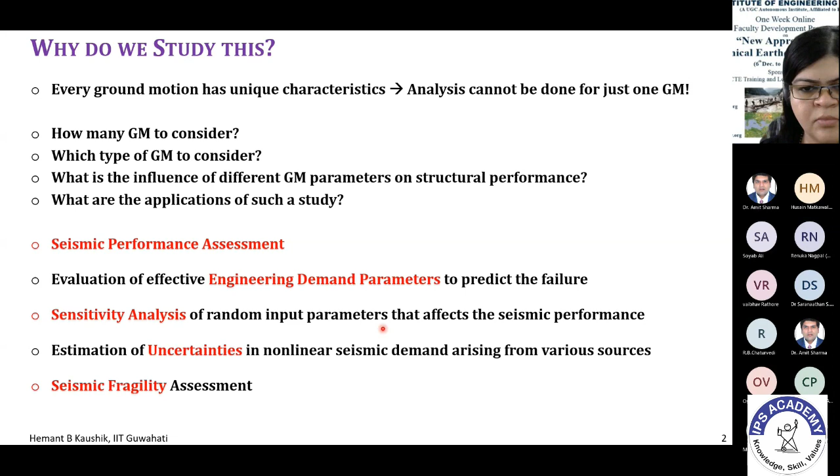First I'll tell you what input properties I will be considering in this study. These input properties remain the same for all the applications. This is a 4-story reinforced concrete frame that I'm considering. This frame is the middle frame of a multi-story building, so I'm analyzing only this frame. These are the dimensions of the building, and the dimensions and reinforcement detailing of the columns and beams. I'm considering three configurations of this frame.

The first configuration is the fully infill frame. The second configuration is the open ground story frame, where we don't have masonry walls in the ground floor—these are the OGS frames. These are the fully infilled frames, FI frames. And these are the bare frames, BF frames, where we don't have any infill walls.

In each of these frames, this is the basic frame, and I'm changing parameters: the number of bays from 1 to 6, the number of stories from 2 to 6, and the opening in the wall from 0% to 90%. 0% opening means it is perfectly solid, no opening at all; 90% means it is more or less fully open in any story. That's the variation in opening percentage. The peak ground acceleration variation I'm considering is from 0.1g, which is very low, to 1g, which is very high. These are the variations I'll be considering in all these studies.

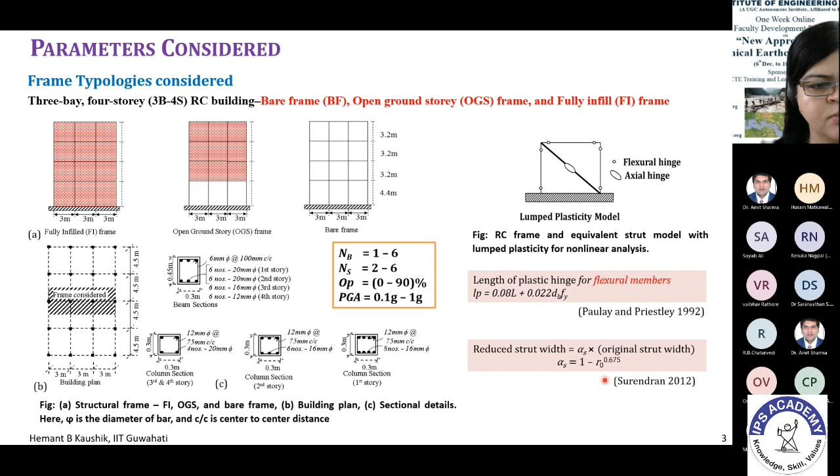If you have to carry out the seismic performance assessment, there are many methods. One of them is nonlinear dynamic analysis, where we use these ground motions. I will be considering all three types of frames and then the material model for concrete. The material model is the cyclic degradation model because we are using dynamic analysis, the cyclic nonlinear dynamic analysis. For steel, this is the material model.

Of course, you have to provide the details for the degradation in the material, and for the masonry infill as well. This is also cyclic, with degradation curves.

Once we have these material models, we have to then consider the ground motions. So these are some of the ground motions that we need. And then we have to carry out some finite element sensitivity analysis, just to understand what kind of refinement, what kind of mesh size, how many elements we have to use.

Considering all these together, we can carry out the dynamic analysis and get output like this, where we are plotting the peak interstory drifts along the height of the frame, for three different frames: bare frame, open ground story frame, and fully infilled frame.

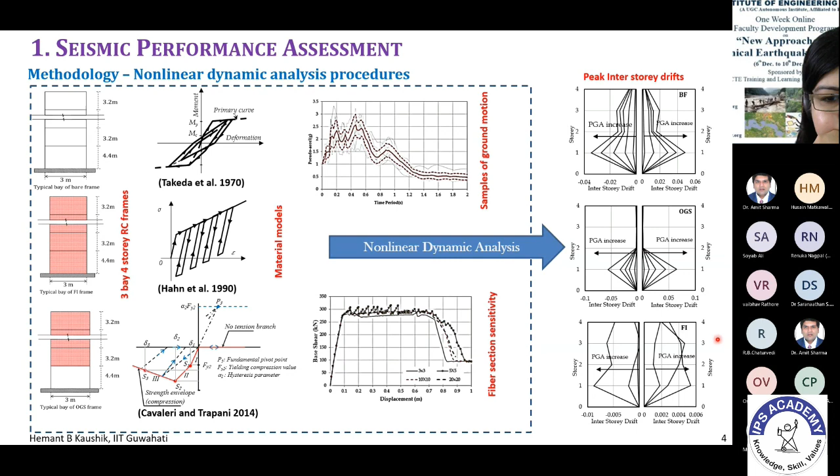For those of you not familiar with energy density, you must be knowing the response spectrum. So here are the response spectra calculated and plotted for each of these 7 ground motions.

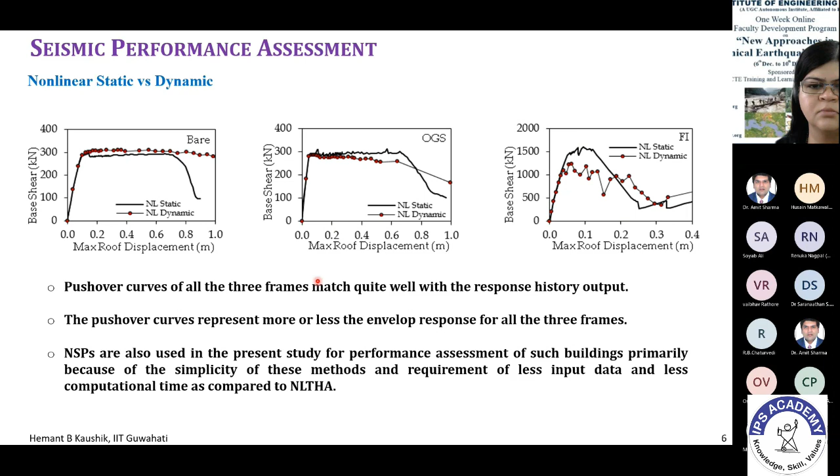Now we'll use all these input properties, all these observations in the second part of the study, which is the evaluation of effective engineering demand parameters. Now the question is, why do we need this? Why can we not simply use the top story displacement as the engineering demand parameter?

Let me inform you that 99% of the studies use the top story displacement as the engineering demand parameter, because that is the easiest demand parameter to obtain.

Now let us see what happens when we do that. So what I'm showing you here is the open ground story building, which is vertically irregular, and we will use some of the local EDP and the global EDP in these buildings.

So we know what is the problem with the open ground story, right? The ground floor columns are subjected to very heavy ductility demand, very heavy shear demand, and most of the time these ground floor columns fail.

What we see is very interesting: most of the lateral deformations are accumulated in the ground floor during earthquake, and the upper floors are more or less undamaged and remain vertical. So there's no relative deformation in the upper stories of the open ground story frame. All the relative deformation is accumulated here in the ground floor only, because it is so soft.

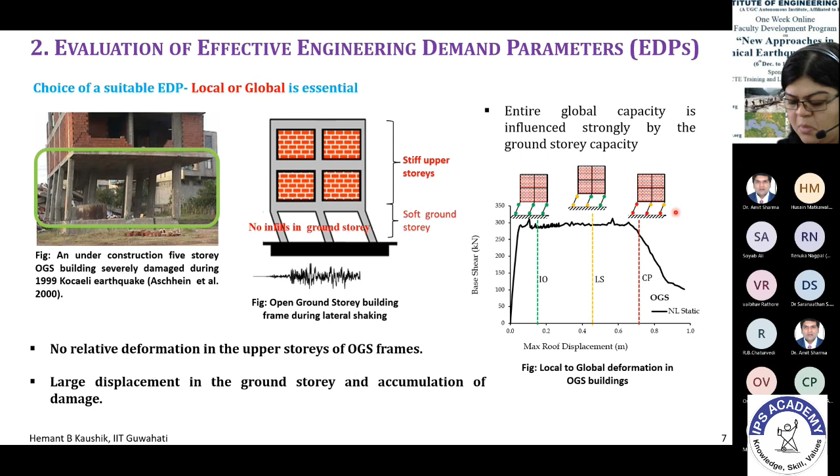So we'll consider these types of failure modes. This is what I was mentioning: when you apply a lateral load at the top, the lateral deformation of the open ground story frame is such that you have huge accumulation of all these deformations here only, and the vertical upper floors don't generally deform much.

So what we did was consider the mean sampled frames. I'll let you know later what these mean sampled frames are. Mean means all the material values, all the geometry values, all the loading values were considered mean.

So there was no variation in the properties as far as the geometry is concerned, as far as the material is concerned, and as far as the loading is concerned. But there are huge variations in the ground motion parameters.

So we consider these 7 ground motions and scaled them for 25 different PGAs. We carried out 525 nonlinear time history analysis runs, and these results are the output of these 525 nonlinear dynamic analyses.

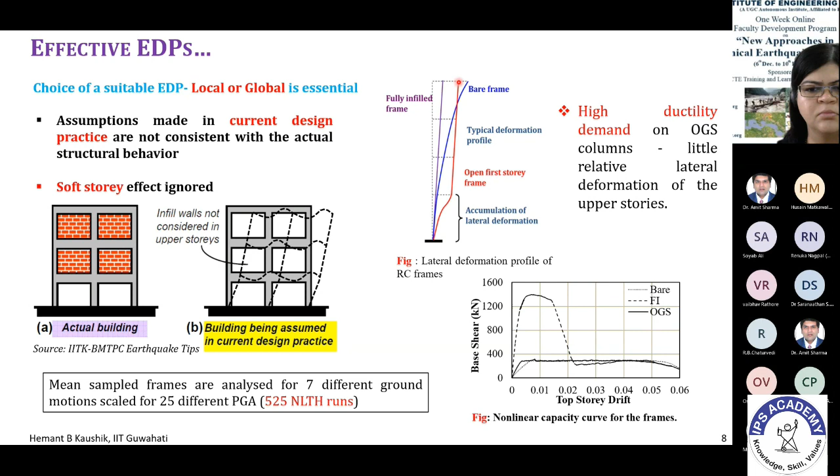In the first instance, we considered the maximum top level displacement as the engineering demand parameter. So if you look at this figure, this displacement only - I'm considering this as the engineering demand parameter.

So considering that displacement, I'm plotting here the relative displacement along the height of the building: first story, second story, third story, and fourth story. I'm comparing these bare frame deformations with the open ground story frame deformations.

As we discussed already, in the open ground story, most of the deformation is accumulated in the first story only, and the upper stories remain vertical and undamaged, with not much deformation there. But the bare frame deforms gradually from bottom to top.

Now, if we consider the top level displacement as the engineering demand parameter, it is very obvious that the bare frames are subjected to higher demands. So that means you would think the bare frames are more vulnerable because demands are more.

But that is not true, right? We know that open ground story frames are more vulnerable, they are more risky. So if we compare the full infill frame with the OGS frame, we get these kinds of results. Even in some cases, the full infill frame also behaves more or less like the open ground story frame once the ground floor infill fails.

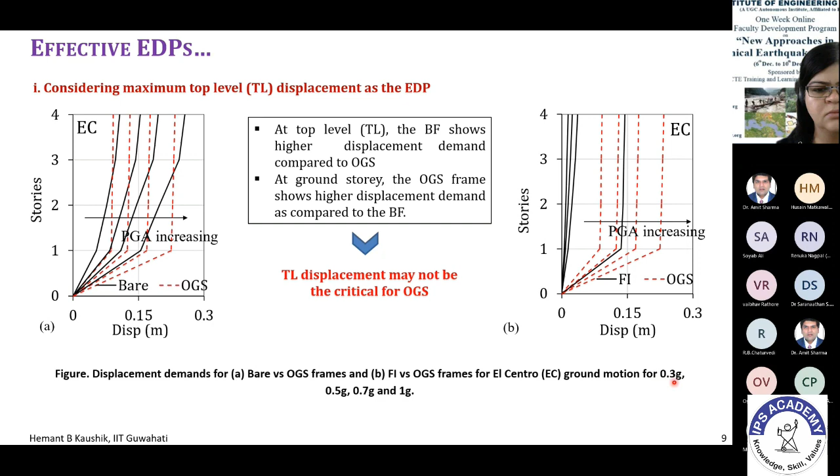Now, this study was carried out for only three or maybe four peak ground accelerations: 0.3g, 0.5g, 0.7g, and 1g. But if we consider the full variation in the peak ground acceleration, right from 0 to 2g, then a very interesting picture comes to mind.

See, here you see all three plots are for the bare frame top level displacement, open ground story frame top level displacement, and fully infill frame top level displacement. So what you see here is that the bare frame, of course, is having the maximum demand, right? Then it is followed by the open ground story and finally the fully infilled. This is not correct. This is not the real behavior of the structure.

Now, if I plot the ground level displacement, then what you get is that open ground story frame has the maximum demand, followed by the bare frame and the fully infilled frame, right? So this is more realistic. It appears to be more realistic. But then, mind you that this ground level displacement we are considering from the same results, right? This is not a different analysis. The analysis remains the same.

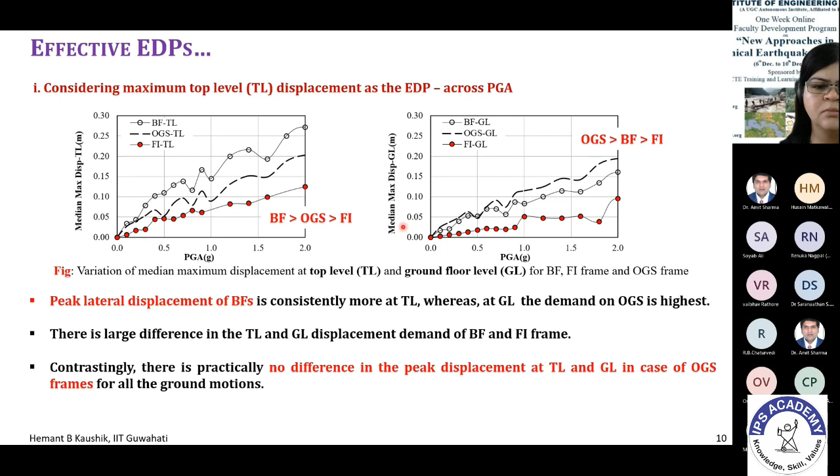Now, let us consider a different engineering demand parameter. So here I am considering maximum inter-story drift as the engineering demand parameter. So look at the output.

If we consider the bare frame versus the open ground story frame, these are the kinds of output we are getting. So even in case of maximum inter-story drift, here it means that the first story inter-story drift we are plotting is the second floor inter-story drift and third floor. So obviously you will find that above second floor there is no inter-story drift in case of open ground story frame, because all the deformations are accumulated here. In case of bare frame, you always have gradual displacement from bottom to top, and these are the variations, the relative displacement variations, which are actually the drift across the height.

So this appears to be a better model, because in every case you will get the demand more in case of open ground story, right? Even if you compare the fully infilled with the open ground story, the same story is there. So this is only for the El Centro ground motions. Obviously these results show that the ground floor columns are subjected to very high ductility demand. And we need to have this component level demand to capture the failure. Otherwise we'll not be able to capture the failure, we'll not be able to find out the real vulnerability.

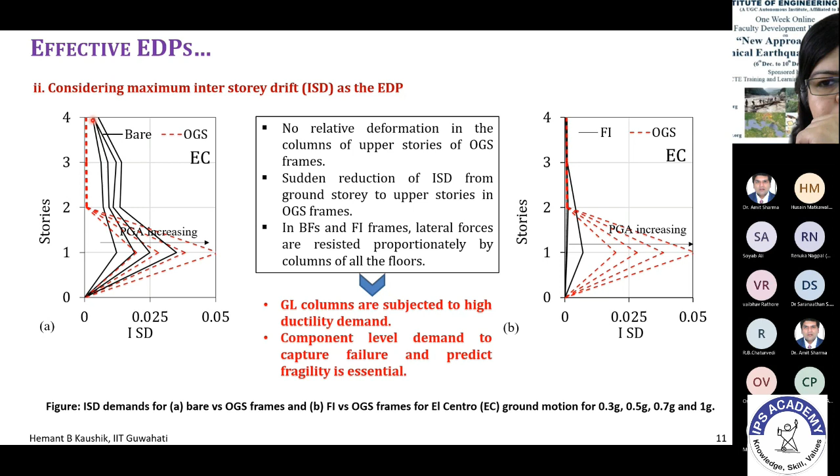So if we now compare across the PGA level, the same ISD as the EDP, a very different picture emerges here. Again, you will get that across the PGA level, you again have this bare frame demand more, if you consider the top story inter-story drift, right? If you look here, after second floor, you have this more, right? So bare frame is more vulnerable in that case after second floor. So this is what is happening here.

This is followed by the fully infilled frame, which is the red dots, and the open ground story frames, which are these dotted lines, right? And if you compare the ground level, the story is completely changed. Again, you will get that open ground story has the highest demand, followed by the bare frame and the fully infilled frame, right? So obviously, we cannot use top story displacement to design the open ground story frames, or even to assess the open ground story frame.

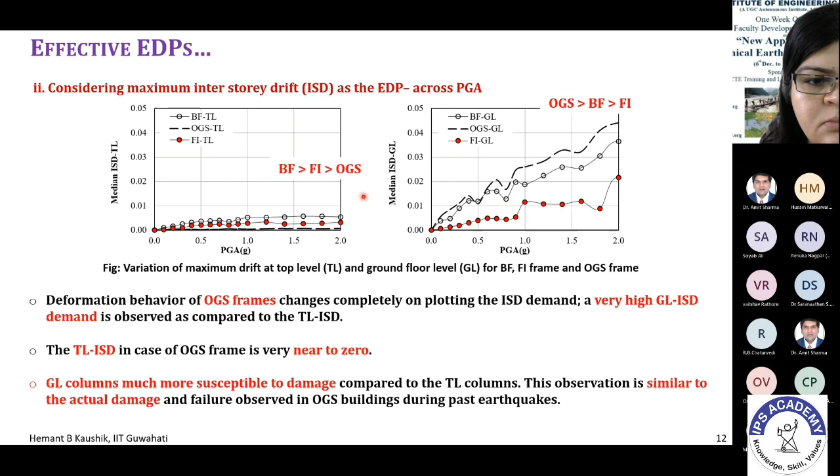Now, if you compare the degradation in the stiffness when the damage occurs in the building, let us compare that degradation by finding out the stiffness factor, which is the ratio of base shear to displacement at different levels. And it is normalized with respect to the maximum top level stiffness.

So when we do that, you can see very easily here that for the open ground story frame, there is no difference at all when we find the stiffness factor for the top level and for the ground level. But for the bare frame, there is a difference. For the full infill frame, there is a difference. So this clearly shows that open ground story buildings have no influence whatsoever coming from the top level displacement. It is only the ground level displacement that is the influencing factor here.

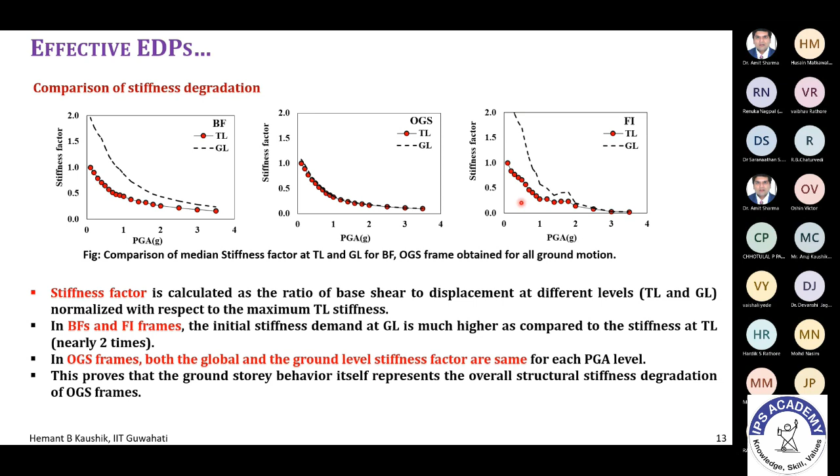But in case of the bare frame, of course, there is a huge difference between top level and ground level displacement, and in the fully infill frame also. So this again validates our observations. Then we can compare various engineering demand parameters similarly. We have compared the peak top level. We can compare the story displacement corresponding to peak top level displacement, and then the interstory drift at top level. We have already considered that, and the interstory drift at the ground level.

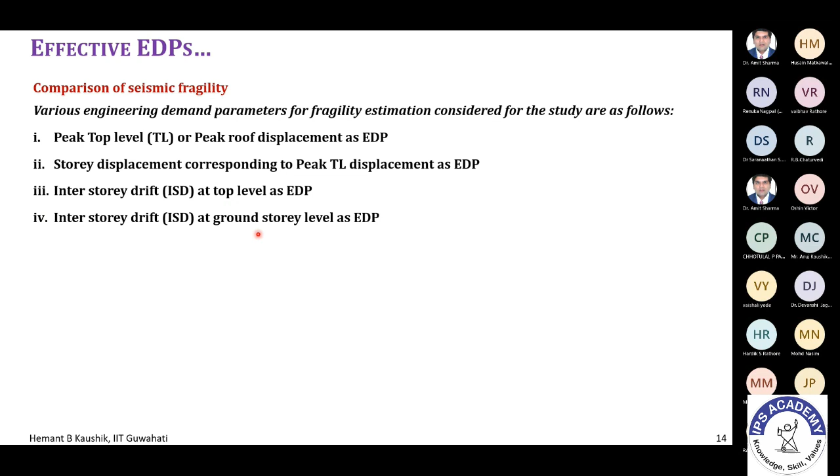And if we find out the seismic fragility, we get these kinds of results for different ground motions. So these are the damage states. For different damage states, we get the seismic fragilities, and these fragilities are shown on the vertical axis here. For slight damage, moderate damage, extensive damage, and collapse, we get such kinds of fragilities. So the shaded bar charts represent the bare frame, and the filled bar charts represent the open ground story.

So you can see here that there is no definite pattern, right? In some cases, the bare frame fragility is more. In some cases, the open ground story fragility is more. Even in the comparison between fully infilled and the open ground story, the same situation is there, right? So what I want to show here is that the fragility estimation with top level displacement as EDP gives the wrong essence of the physical behavior or the failure pattern of irregular open ground story frames under the effect of seismic input.

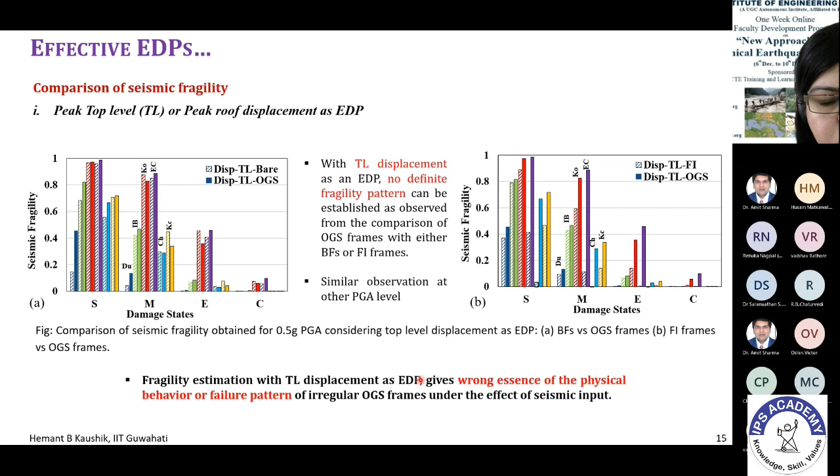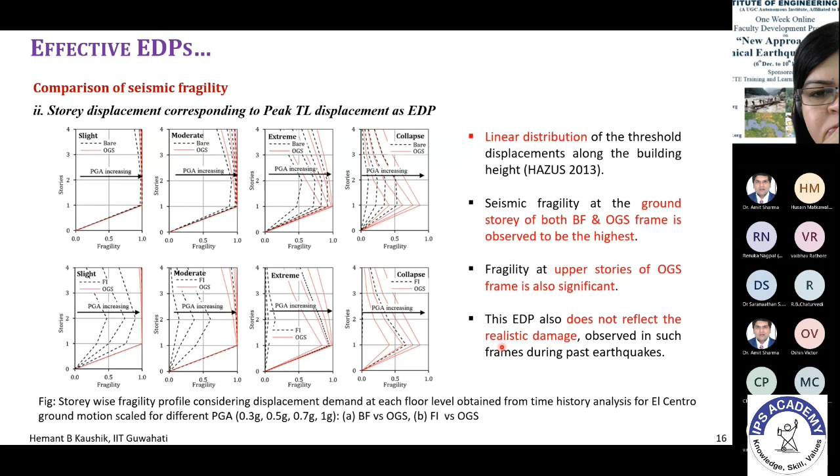So the third EDP: if we use the interstory drift at each floor level as EDP, then we get this kind of behavior. So this is the story-wise distribution of the fragility for the bare frame for one peak ground acceleration, this for OGS, and this for fully infilled. So again, same story, right? For each floor level, if you use it, then it's not much use actually, because the behavior is more or less similar in all three cases.

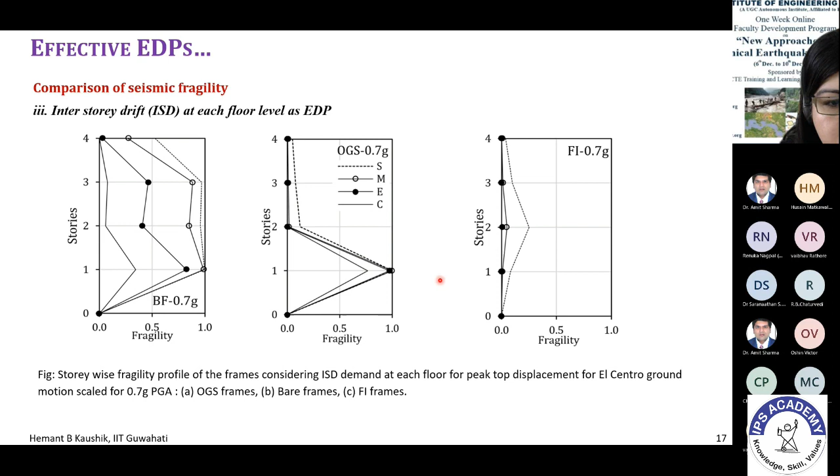And here also you will find these are the fragilities for the interstory drift at top level as EDP. So you can find that the seismic fragility of the top story columns is almost nil. We are talking about the top story here. So for the OGS, the solid filled bar charts are almost not there, right? So the seismic fragility is very less, almost nil, compared to the bare frame or the fully infilled frame. Again, not realistic here, and basically we are not worried about these top story columns in case of OGS because we know these columns don't fail.

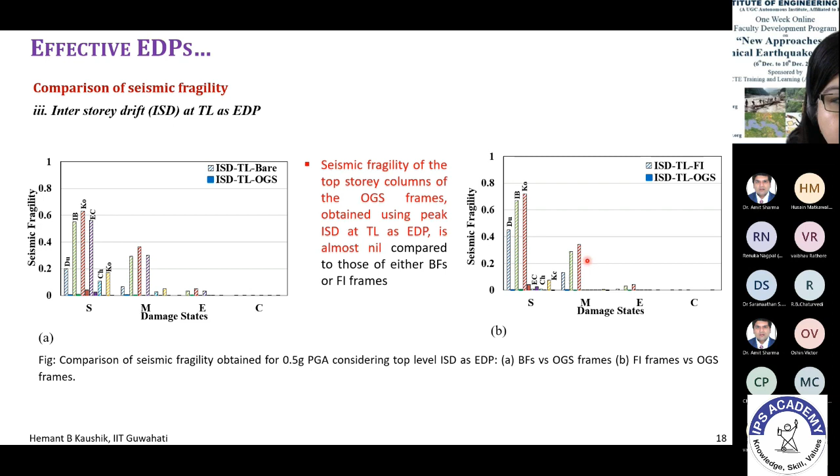Now, in contrast, if we use the interstory drift at the ground story, then the complete picture changes actually. Now you can see that these solid boxes are always higher. These bar charts are always higher compared to the bare frame as well as the fully infilled frame. This clearly shows, for example, look here. This is the fully infilled frame, the shaded bar, and this is the open ground story. See how different the seismic fragility is for each of these cases. Now this is realistic. We see that fully infilled frames during earthquakes don't collapse.

The frame can still collapse if the ground floor infill fails. In this case also, you can see the shaded one versus the solid one, so there's a tremendous difference. In all cases, the seismic fragility of open ground story buildings is much higher than the bare frame or the fully infilled frame.

This clearly shows that if we use the component level demand parameter—component level meaning the interstory drift at the ground story level, that's the component—then it is more realistic than using the conventional method of roof displacement as the EDP.

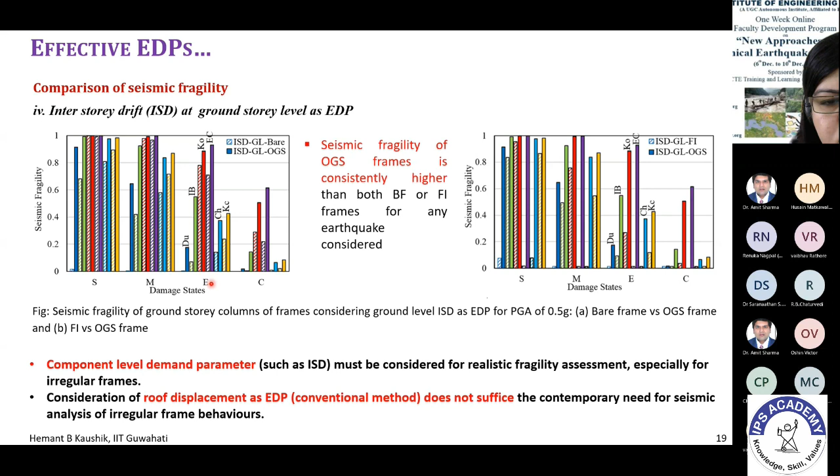Although I'm not showing you the individual responses from those analyses, around 525 nonlinear dynamic analyses were carried out to get these outputs. This is just the output from one ground motion for one damage state, and there are so many damage states and so many earthquakes—it takes a lot of time.

The next part of the study is estimating the sensitivity for these random input parameters. We need this sensitivity analysis at the next stage also for evaluation of uncertainty. So the sensitivity analysis is carried out on these 11 parameters.

These are the grade of concrete, the FCK value, the yield strength of steel, the masonry prism strength, damping, width of column, depth of beam, material density of concrete, material density of infill, the imposed load of infill, self weight, the width of the strut in the ground floor, the width of the strut in the upper floor, and the compressive strain in the strut. So these 11 parameters we have considered in the analysis.

These are the mean values shown here. If you remember, initially I said that mean frames were considered, so in those frames only these mean values were used—no variation was used there. These are the coefficients of variation we consider for each of them, these are the standard deviations, and these are some of the references from where we have utilized these values.

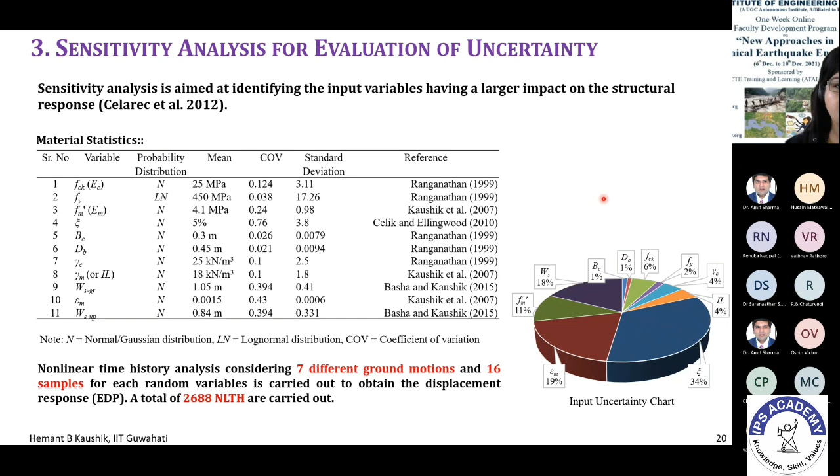So we'll see what is the influence of variation in these input properties on the output of the structure. That is the sensitivity study.

So how many? Some 2,700 ground motion nonlinear time history analyses. These results are compiled here in a very simple, simplistic way so that you understand quickly. These are called radar charts.

Along the periphery you have 16 samples, which are samples of the random variables. Along the radial line, as you go out from the center, the displacement increases. These are normalized displacements from 0 to 1, so displacement increases as you move away from the center.

These different colors represent 7 ground motions: 1, 2, 3, 4, 5, 6, 7. These numbers represent the coefficient of variation in BC, the width of column. This is also BC, but these are for 3 different frames: bare frame, open ground story, and fully infilled.

Here I'm showing the variation in depth of beam for the 3 frames. Now it's very clear if you look at this figure where there is more scattering. The more scattered the results, the more influencing those parameters are. If you look here, there's not much scattering at all. Whatever you do, even if you change the depth of beam across all 16 samples, change the ground motions, or change the type of frame, it doesn't matter much, except for in the fully infilled frame where there's marginal scattering.

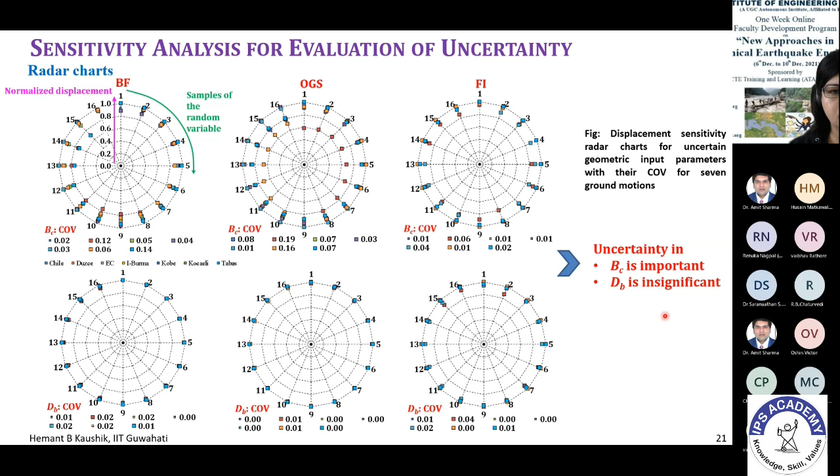In all three frames there's a huge variation. So simply, BC is more important as far as input parameters are concerned, and DB is less important. That's for the output. Similarly, you can see the variation in FCK and FY, and you'll find that FCK variation is more important in this analysis, while FY variation is not as important.

They are important—not as bad as depth of beam—but comparatively FCK variation is more important because that's where cracking starts, where the reduction in stiffness begins.

So these are the kinds of analyses required to find these results. Then there's the variation in damping and variation in material density. Again, material density doesn't show much scattering compared to damping. You see here how scattered the results are, so zeta is more important, particularly in case of fully infilled frames.

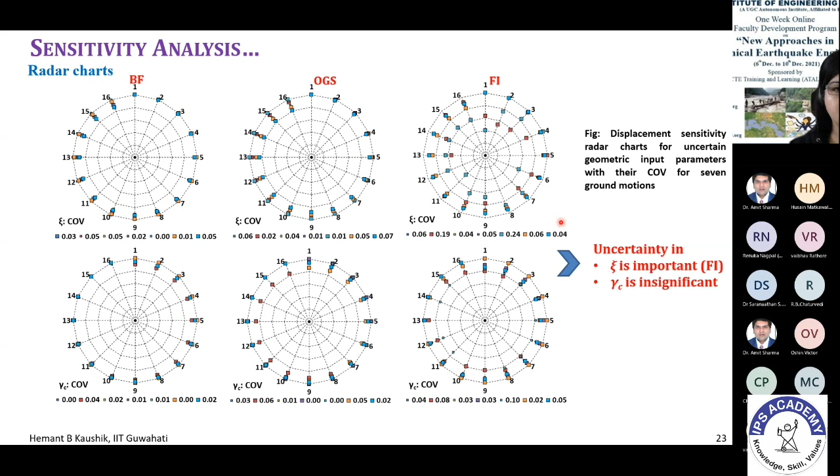Consider imposed load versus FM prime. Obviously FM prime will be more important in case of fully infilled frame, but the imposed load may not be as important. Even the width of strut will be more important, and FM prime will be more important too. So what I'm showing here is the imposed load for all three frames—bare frame, OGS, and FI—and FM prime, width of strut, and epsilon m strain for FI.

Because FM prime, width of strut, and strain in masonry are not relevant in case of bare frame or even OGS, I'm just showing results for the fully infilled frame. Look at the variation in results—huge variations.

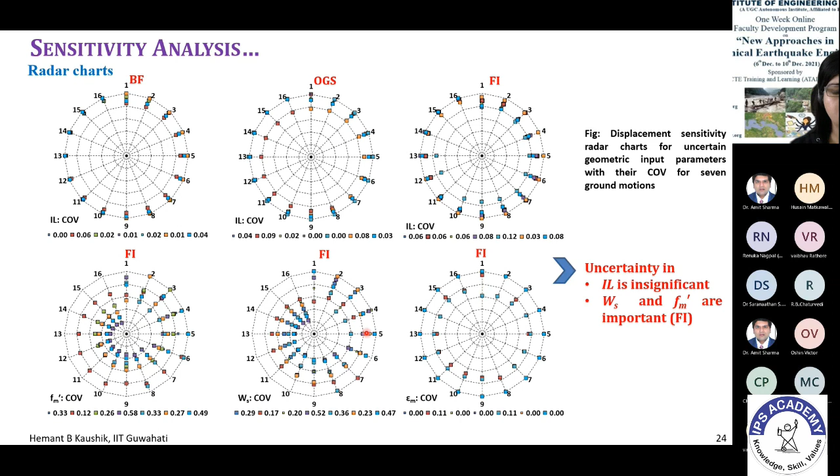So what if we change the type of analysis—instead of radar charts, if we simply use bar charts, do we get similar results for the important parameters across different ground motions? These are plotted for all 7 ground motions, and out of 11 parameters, I'm showing here 7 important ones.

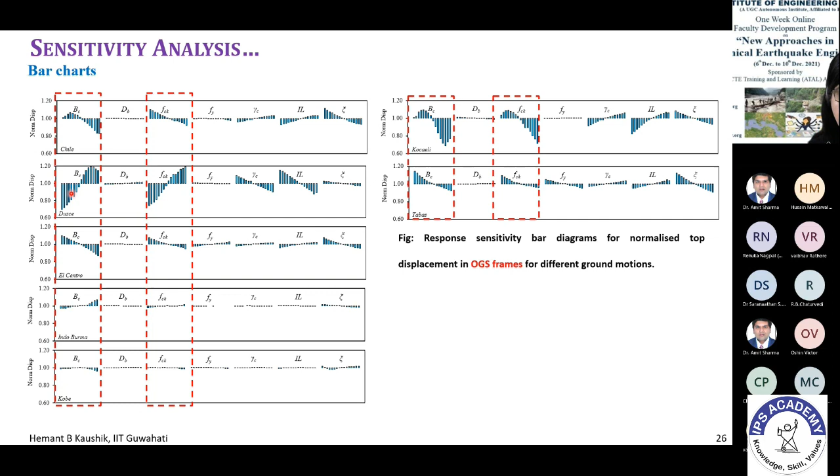For open ground story frame, similar results, BC and FCK. These are the changes. In some cases, the imposed load is also there, but not much compared to these two. In full infill frames, these values are not at all important.

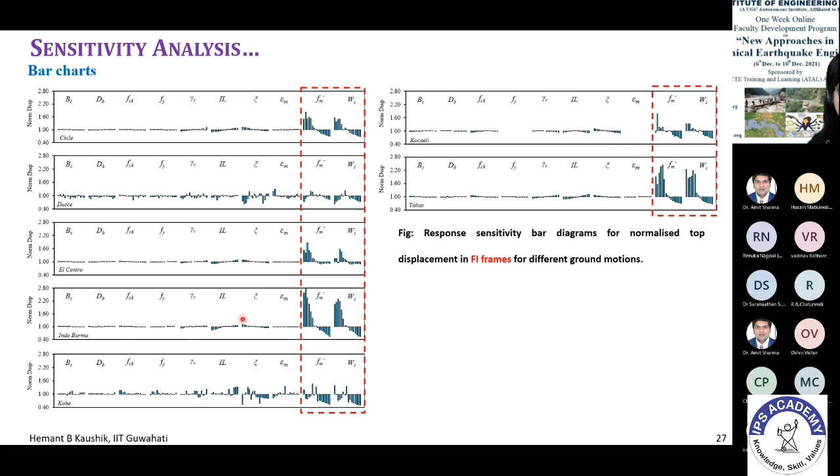What is important is FM prime and the width of strut compared to all others. These are some common sense observations. We can say this is perfectly all right, because in full infill frame, initially most of the lateral loads are resisted by the masonry infill.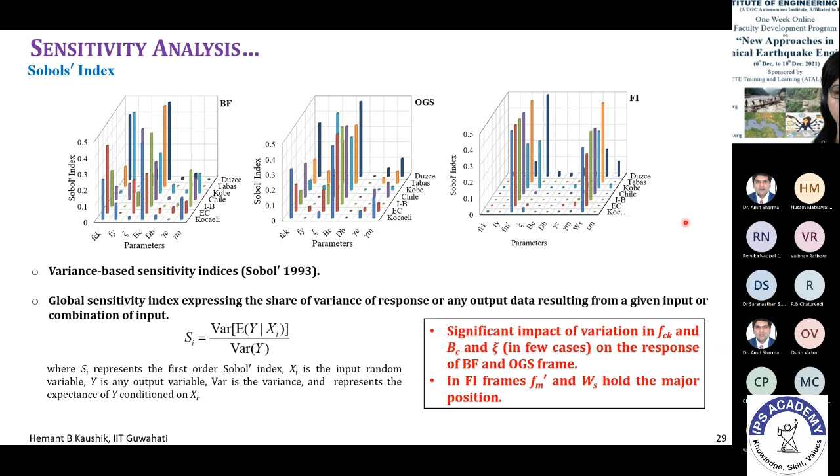So in the end, this figure I already showed you, these are the relative differences in the uncertainty or the variation in the input parameters. Now let us see what is the uncertainty in the output considering these variations in the input.

So this is the response sensitivity chart. Now remember there's only 1% variation in the width of column as input, but because of that 1% variation you get 30% variation in the results in the output of bare frame. This is very important. Similarly, in the open ground story frame, you have 30%, 31% variation, which is the maximum variation.

In FCK, there is a change, which is only 6% variation, but we get 26% variation in the output in bare frame and OGS frame.

And in case of fully infilled frame, the maximum variation comes from FM prime, 35%, and width of strut 29%. BC is only 3%. FCK is only 3%, doesn't matter. And some portion of zeta, but mostly it is FM prime and WS. Even here, FM prime variation is 11%, and WS variation is 18%. So this is the different kind of

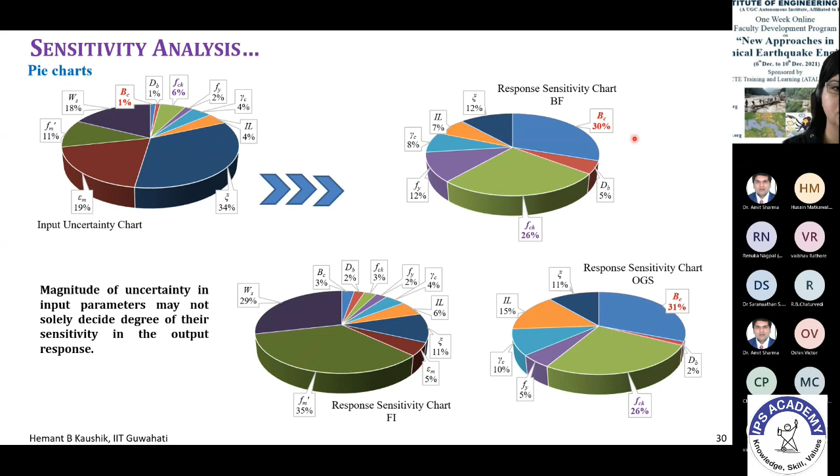Fine, so now we will use all these results in the uncertainty estimation to actually find out the fragility. So there are two basic sources of uncertainties.

One is the aleatoric uncertainty, which comes from the record to record variability in ground motions. Every ground motion is different, and we can have synthetic ground motions, deliberately changed to provide some uncertainty by some changes. So this is aleatoric uncertainty.

And second is the epistemic uncertainty, which is coming from the inherent variability in the random system parameters, like all these 11 parameters that you have considered. So we again have to carry out a detailed nonlinear analysis to estimate this uncertainty.

This is a very simple equation proposed by Celik and Elingwood. It's SRSS actually, so total uncertainty is SRSS of beta D, the uncertainty in demand coming from ground motions, uncertainty in capacity coming from system parameters, and uncertainty in modeling. So these are the three.

Beta M is generally assumed to be 0.2. So no separate analysis was carried out for beta M, but we carried out analysis for beta D, S, I, and beta C.

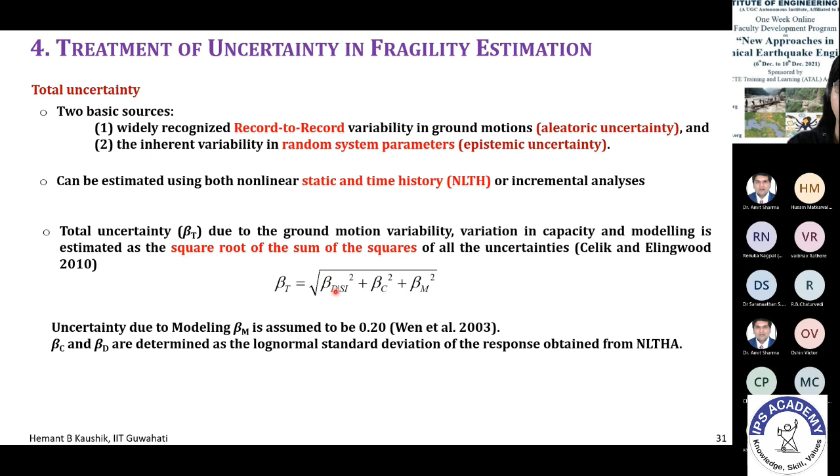And this is a very well-known log normal equation for estimation of seismic fragility, which is suggested in HAZUS's code. Using this equation, we can get the probability of exceedance of a certain demand parameter. We'll discuss that later.

Just to show you what is the variation in the fragility when we vary the uncertainty. When we vary the uncertainty from 0.1 to 1.2, we get so much variation in the seismic fragility. This is seismic fragility estimated as probability of exceedance of a certain damage state, considering spectral displacement as the demand. So there's a huge variation.

That is why we must understand for what level of uncertainty we have to plot this seismic fragility.

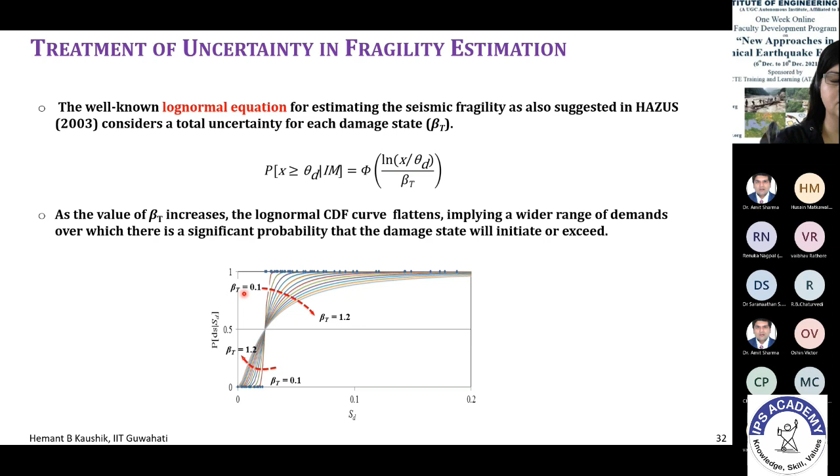So again, we use the same 7 ground motions, 16 different samples of these ground motions created by having frequency dependent envelope curves for these ground motions. So total of 112 ground motions, and then we again change the peak ground accelerations from 0.0 to 2.0, so there are 25 peak ground acceleration values for each of these ground motions, and we considered 3 different frames for each analysis, finally getting 8,400 nonlinear time history analysis runs just to estimate the uncertainty in only the ground motion.

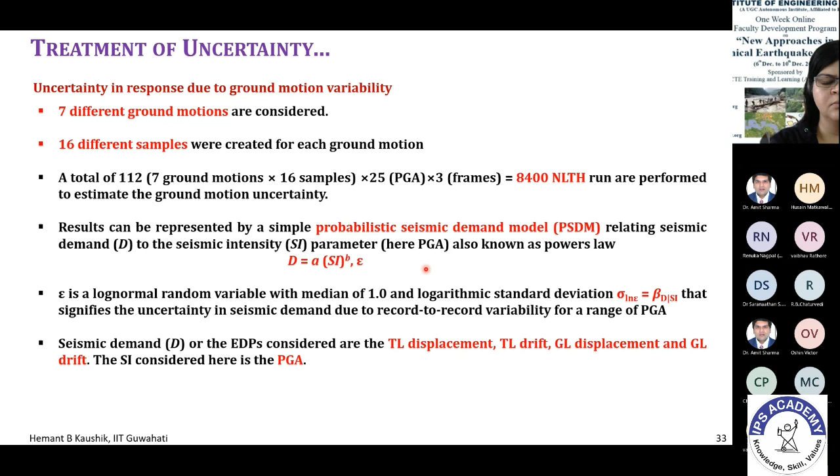So these many analyses were carried out, and we used a probabilistic seismic demand model. This demand model was used to estimate the A and B value for a particular seismic intensity, which is PGA. So we use this power law.

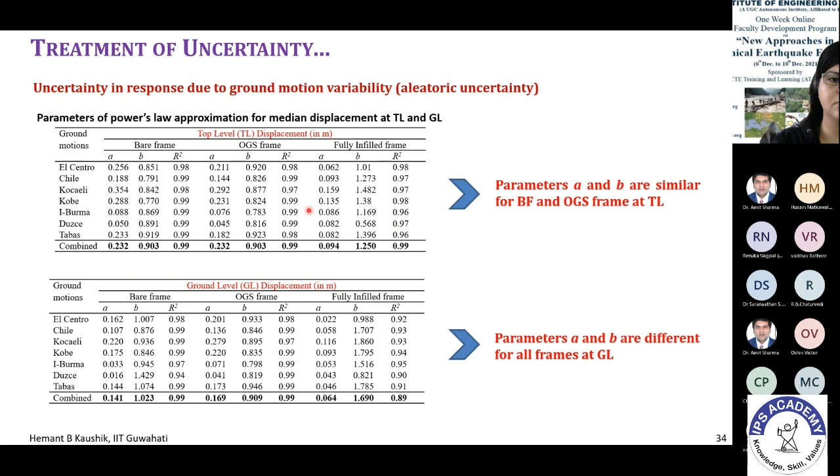I'll not go into too much detail here, but this is the kind of output we get for different ground motions. We estimate these A and B, and for each estimation we get the R squared values, which is very high, near to 1, for all 3, for top level displacement and ground level displacement, and these are the uncertainty in responses due to ground motion variability.

So aleatoric uncertainty we have tried to obtain. This is for the bare frame top level, open ground story frame, fully infill frame, and similarly the 3 frames for the ground level displacement.

These red dots are the combined uncertainty coming from all these ground motions, and these are the 7 curves for the individual ground motions. So standard deviations you can get from all these.

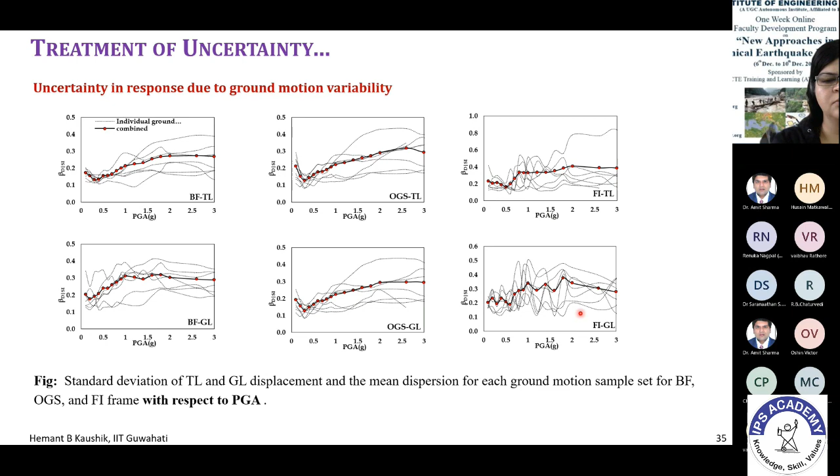What are the values generally expected for beta DSI, we'll discuss later. But from here you can say it's varying from maybe 0.15 to 0.3 for bare frame top level, and for OGS the variation is different, and for fully infilled also the variation is different.

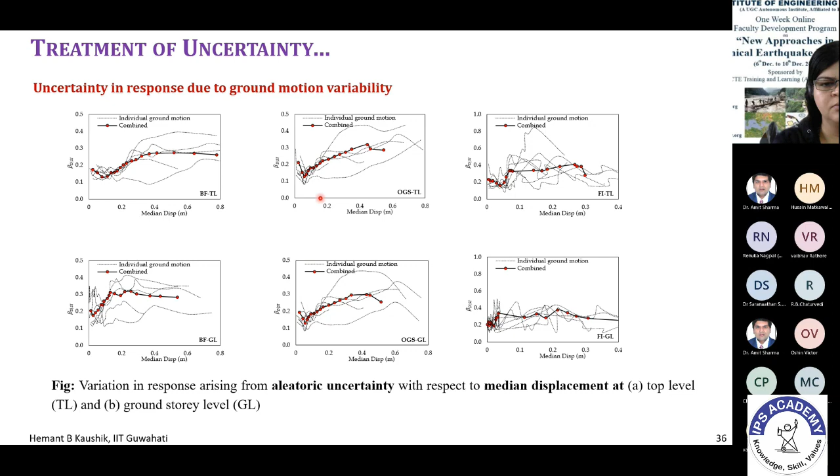We can compare them with past results, and they are more or less matching, with the difference that those past studies were not carried out for ground level displacement, which is more important.

Now mind you that this uncertainty is only the aleatoric uncertainty coming from ground motion variability. So obviously the uncertainty obtained is not suggested in the literature as the EDP; ground level displacement as EDP is not suggested in the literature.

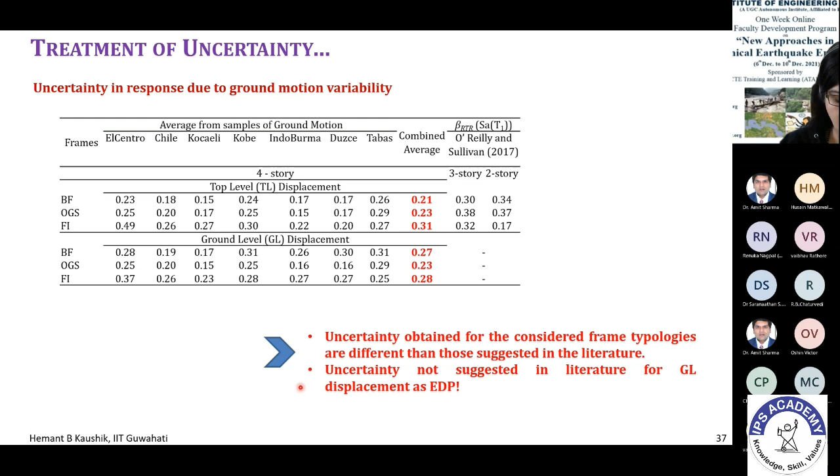So now how about the epistemic uncertainty? For that we need to create a lot of models, a lot of data. Thousands and thousands of analyses were required. We cannot do so many analyses because for aleatoric uncertainty we carried out more than 8,000 analyses. So you can imagine we need to carry out 40, 50,000 analyses for epistemic uncertainty. So we did not do that.

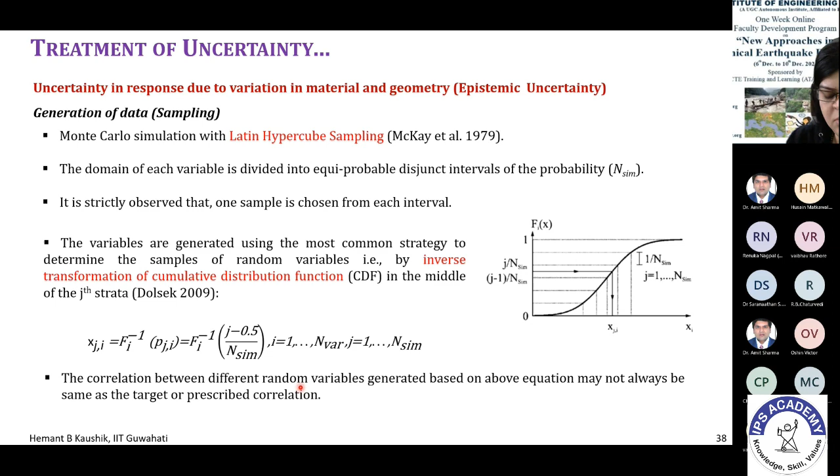Instead, we used a simulation sampling method called Latin hypercube sampling, which helps us reduce the number of analyses without reducing the quality of the output. So these are some of the methods in generation of the data.

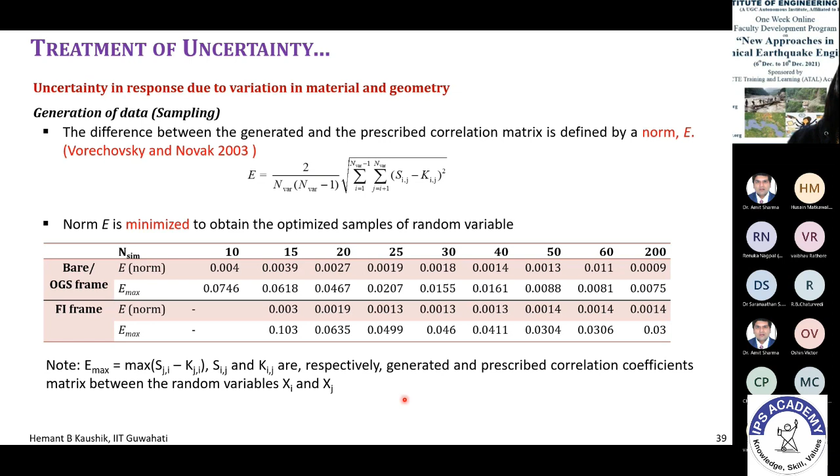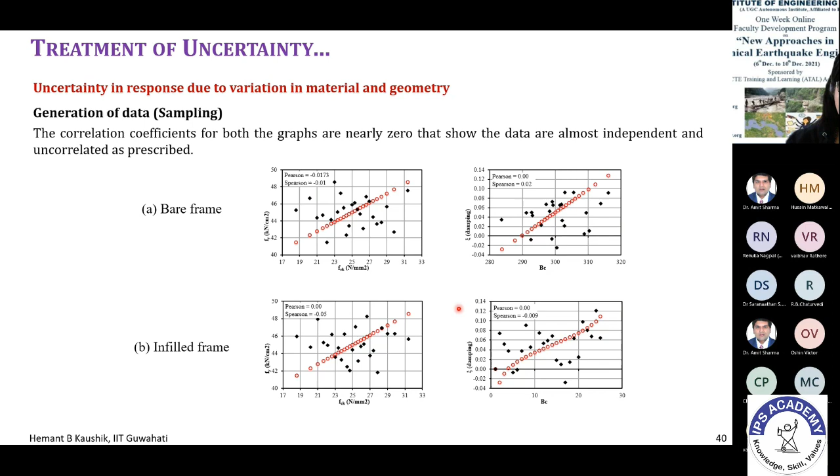People have suggested many norms. We carried out a lot of simulations just to see how many samples are required. Finally, using the Spearman and the Pearson correlation coefficients, we found that 25 simulations for individual ground motions, considering 3 different frames, can give similar output to what we'd get from thousands and thousands of analyses. So finally, we used 3 frames, 25 models, and 30 PGA, peak ground acceleration.

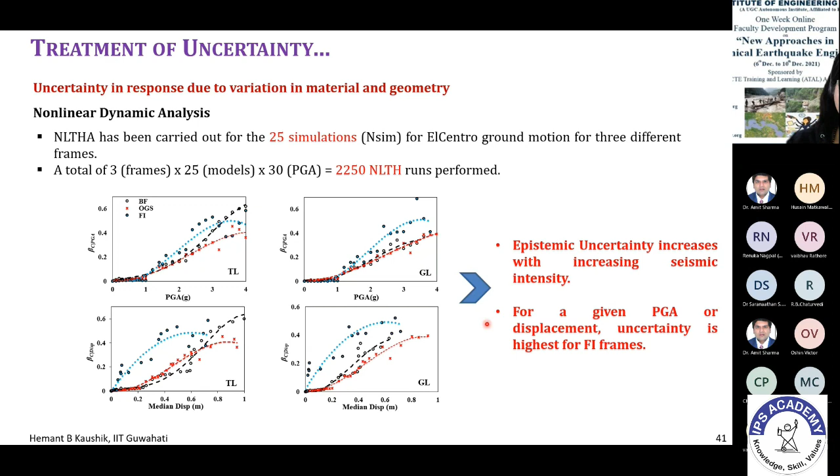So finally, what we get is the beta, the uncertainty value, compared with that coming from the codes. Some codes are available for reinforced concrete and reinforced concrete URM structures, with limited numbers given in the code, giving median values and beta values. What we get is 0.5 in the present study, which is much different from what is specified in the code. This is not the Indian code, this is the US code, HAZUS.

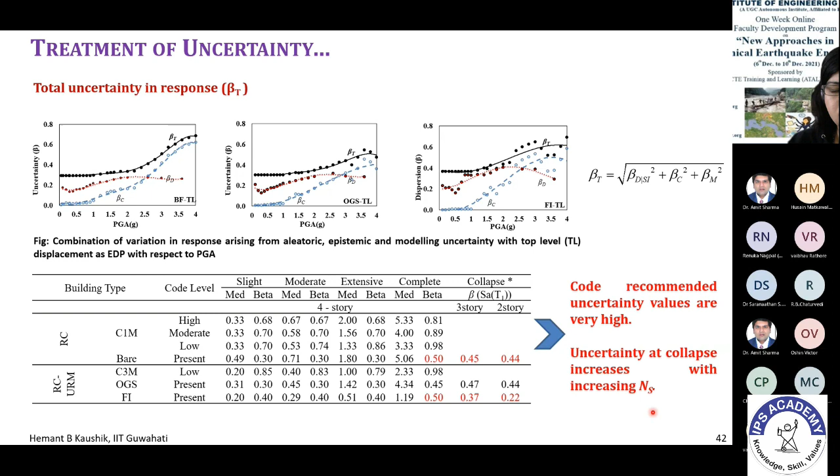And for infill frames also, we get different results. Uncertainty in collapse increases with increasing number of stories. That was also observed, which can also be seen from here.

If we take these uncertainties and plot the fragility values, we get different fragilities for different uncertainties. We are plotting them for 3 different types of frames specified in HAZUS, for slight, moderate, extensive, and complete conditions - reinforced concrete infill buildings and bare frame buildings. So we cannot simply use the category given in that code for our type of building. This C1M predicts almost similar fragility as the bare frame, so we can compare these bare frame results, but not the fully infilled or the OGS frame results.

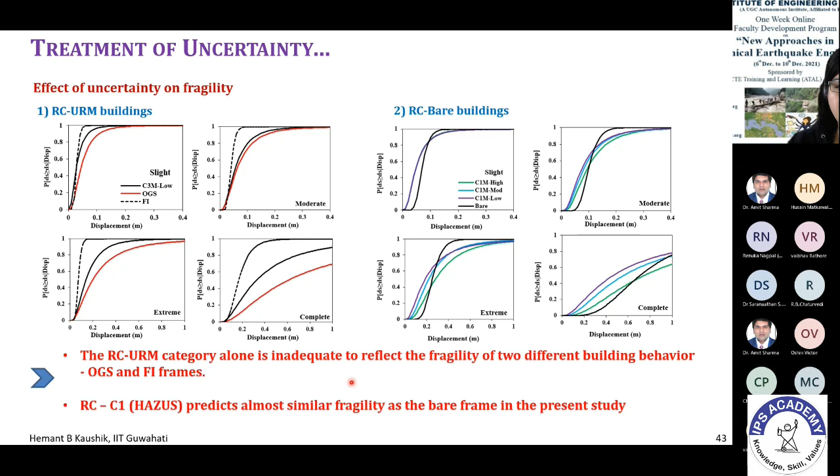So then the final part of the study is estimation of seismic fragility. What we have done: we consider the buildings, use nonlinear static and nonlinear dynamic analysis, use the response spectrum, vary the material properties, vary the ground motions, combine them, and get the responses using the two methods, nonlinear dynamic and nonlinear static. Finally, we obtain the seismic fragility considering the local or global EDPs, considering the sensitivity, and considering the uncertainties.

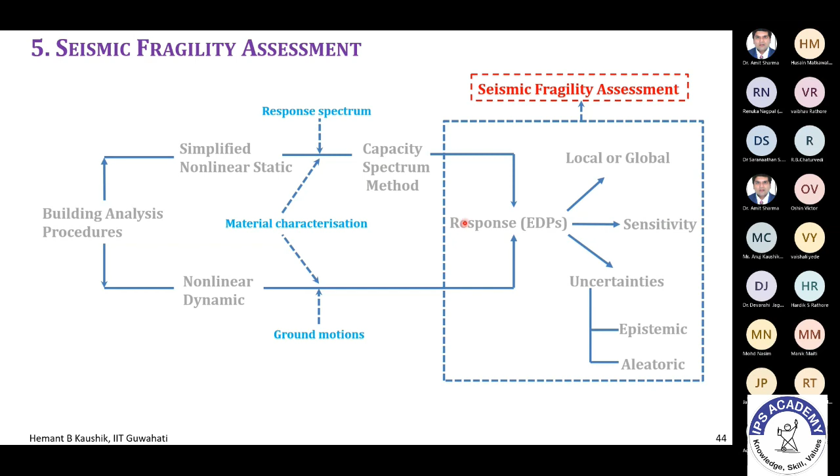So this is what is required to be done if we have to do a complete fragility assessment. But then people generally don't do this full analysis. They assume some uncertainties, they consider some sensitivity, and they can directly obtain the seismic fragility.

Initially, I said that I'm varying the openings in the fully infilled frames as well as in the open ground story frames. So here, the fragility curves show the influence of openings. For 4 different damage states—slight, moderate, extreme, and complete—we have 3 different frames. Here I'm not considering any opening; these are for 0% opening, and these are for 50% opening. You can see the variation between these 2 curves. If you have these openings, the seismic vulnerability or fragility of the fully infilled frame slightly comes down.

But otherwise, there is no change in the open ground story frame—that fragility remains the same. Even the bare frame doesn't matter. So that is one important output: openings in the upper floors doesn't really change the seismic fragility of the open ground story buildings.

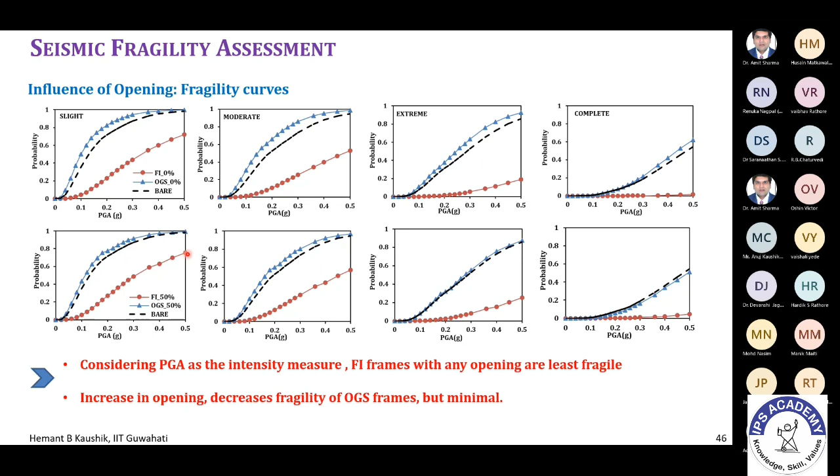Here we use the spectral displacement as EDP, and here we are using the peak ground acceleration. Similar story—it doesn't really matter whether there is opening or not. The open ground story buildings remain more fragile for all cases and damage states.

Here I'm showing you the fragility contours—similar results but in a slightly different way. These are for slight, moderate, extreme, and complete, for this combination of opening and PGA: 50% opening and 0% opening at different PGA. Here I'm changing the number of bays on the x-axis, 1 to 6, and on the y-axis, the number of stories. These are the fragility contours.

So what we get here is that for a given PGA and number of stories, if you consider only this chart, the fragility increases with number of bays—obviously you have higher fragility when the number of bays increases. Similarly, fragility also increases with number of stories. So if you fix the number of bays and increase the number of stories, you have more fragility. And for a given PGA, number of bays, and number of stories, fragility decreases slightly with openings—if you compare this with this, there's a slight reduction in fragility.

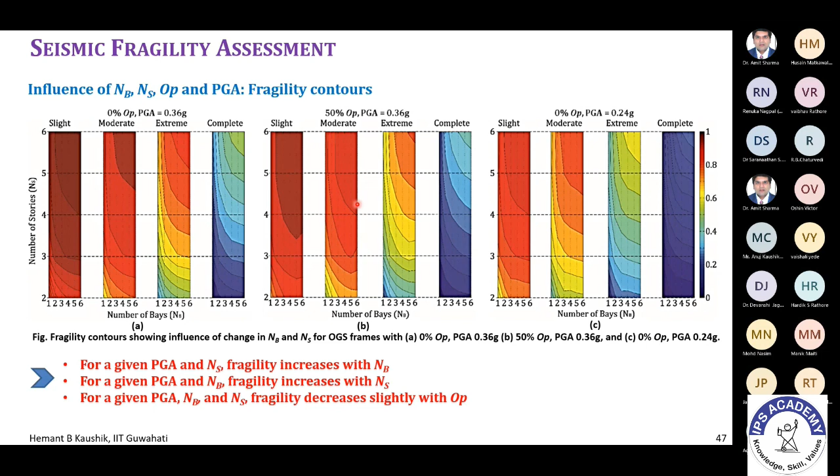Here I'm again comparing the nonlinear static analysis results with the nonlinear dynamic analysis results, and we get more or less similar output: the open ground story frames are the most vulnerable, even if we provide openings in the upper floors. More or less, the static procedures overestimate the fragility, and at higher peak ground acceleration, the fragility of fully infilled frames becomes similar to open ground story frames—as we've already observed, for high PGA they remain more or less the same.

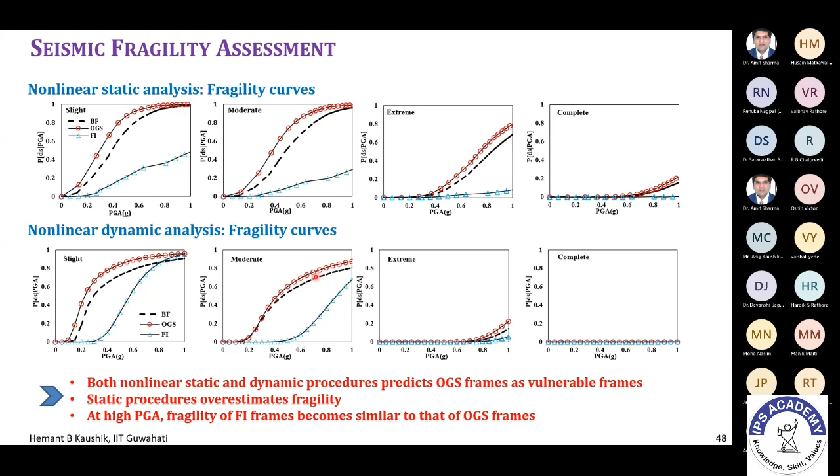So these are the final conclusions of the talk today: the lateral load behavior of open ground story frames does not depend on the openings in the infill walls, but the fully infilled frames do depend on it. That means the ground story infill plays a significant role in the lateral load resistance.

For regular frames, we can use a conventional engineering demand parameter, but for irregular frames, we have to use the component level engineering demand parameter for estimation of realistic damage and fragility. The component level EDP is also required for regular fully infilled frames that can become irregular when we have failure of the ground floor infills.

The sensitivity analysis shows that the response of the bare frame and the OGS frame is highly sensitive to BC, which is width of column, and FCK. Similarly, for the full infill frame, the most sensitivity comes from the prism strength of masonry and width of the equivalent diagonal strut.

We also calculated the total uncertainty by considering aleatoric, epistemic, and modeling uncertainties, and we observe that our codes are not adequate as of now to tell us the proper uncertainty that can be considered in the analysis. Finally, the seismic fragility obtained using simplistic nonlinear static analysis is found to be more conservative than that obtained using nonlinear dynamic analysis. So even if we don't carry out this more complex nonlinear dynamic analysis, we can still use the nonlinear static pushover analysis procedures properly and systematically, and still get the seismic fragility with reasonable safety margins.

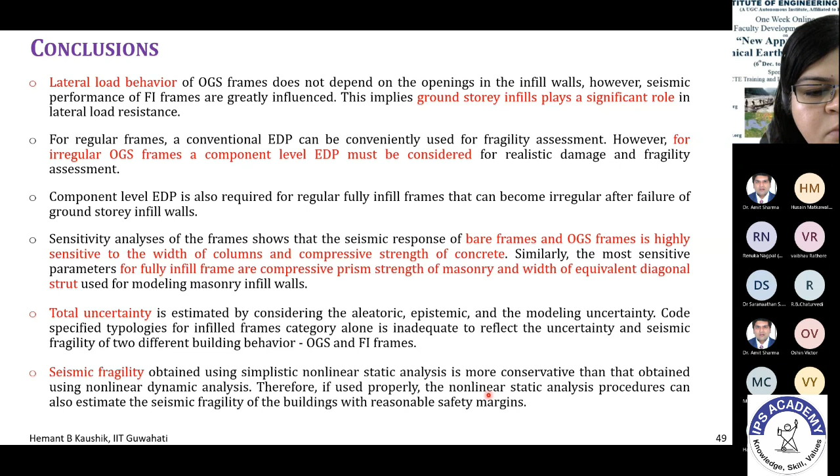The study that we discussed today—all these results were the PhD thesis of Dr. Trishna Choudhury, who is presently working at Thapar University in Patiala. I really wish to thank her for the excellent work she carried out during her PhD, and thank you everybody for patiently listening to this lecture.

I hope I was clear. If there are any questions, feel free to ask.

Sir, first of all, the lecture was not at all boring—it was very informative and interesting. Thank you. Participants, do you want to ask something?